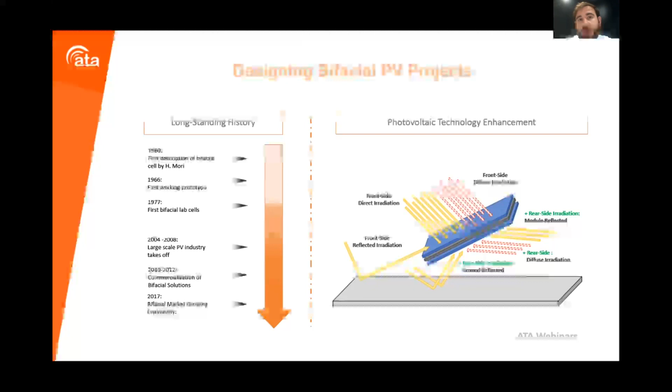This webinar is not only about bifacial modules, but also about designing PV projects with this technology. There are several factors you'll have to rethink when designing bifacial photovoltaic projects, such as the pitch, the tracker height, and the ground coverage ratio, as those factors affect the yield gain of the project. The idea is always to optimize the base case.

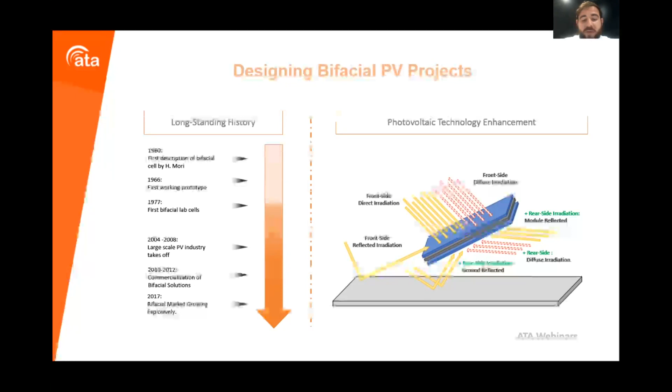For example, the height of the tracker being as tall as possible could be better for the bifacial gain, but you'd have a higher cost for your tracker. So you always have to look for the optimal point. I'm sure our panelists will explain this factor in greater detail.

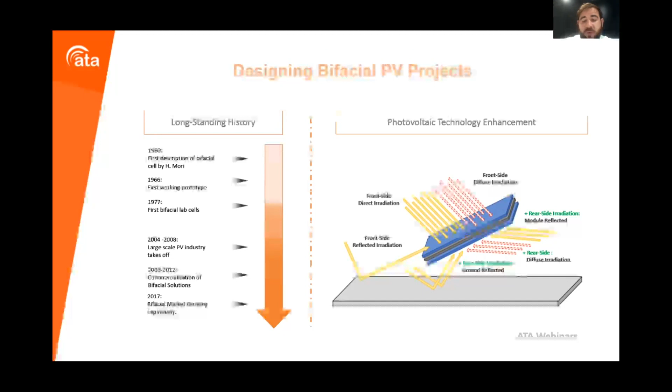There are also other factors like knowing the albedo of the project location, which is now critical, as well as other weather parameters such as humidity. It's also very important to start collecting data from ongoing projects to better understand the whole commercial potential of this technology. This is where advisory services may be required, helping to achieve proper design and construction of bifacial projects, as well as validating results collected in ongoing projects. At ATA, we are already participating in several projects and look forward to increasing our experience with this technology.

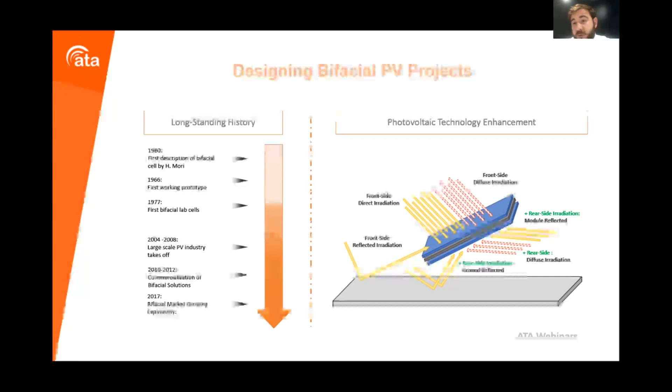Hello everyone, thanks for joining in from different corners of the world. My name is Vaibhav Joshi, and I'm heading business development for Sterling and Wilson for the Asia and Australia market. Sterling and Wilson is today one of the largest global solar EPCs, and outside US and China, we are the number one EPC in the world. We have been working with all the new technologies that come across the world, be it bifacial, floating solar, storage, and more.

So we have done our own analysis and our own understanding when it comes to bifacial. My presentation will give you a brief about what bifacial is and the main factors it works on, followed by the basic parameters to be looked into - introduction to bifacial, what is albedo, the basic ingredient of bifacial, then the yield parameters to be looked into, cost parameters, advantages, and then some issues. I won't say disadvantages, they're more issues which need to be tackled going forward. And lastly, what's the future, how we are progressing in terms of bifacial.

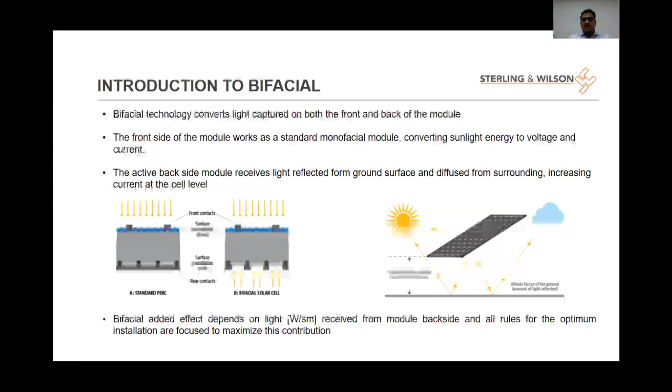Basically bifacial is all dependent on the albedo, how the albedo of a particular site is defined. So what's albedo? Albedo is basically a ratio of the reflected radiation that comes back from the ground divided by the actual radiation on the site, and this albedo differs based on the type of soil or type of ground which we are having.

If you see, the more clear the site is, when we say clear, we move towards, let's say, snow and mirror. So the clearer the site is in terms of properties, the best albedo you get, and this albedo is captured by proper technology, in terms of how we put the installations with the trackers, with the modules, with the inverters, that how best we can capture this albedo, that defines our gain.

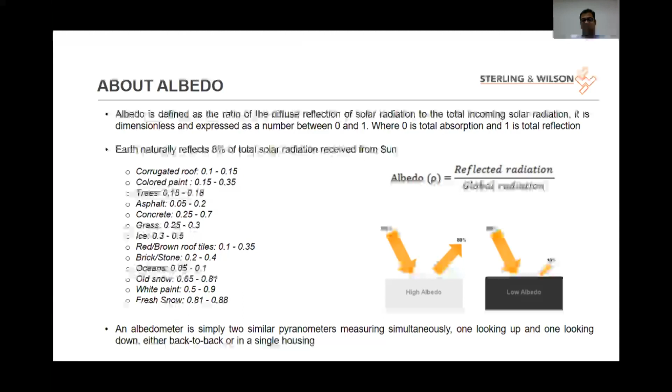Many of you would have heard about a device called Albedo Meters. An albedo meter is nothing but simply two pyranometers put together, one facing up, one facing down. This albedo meter actually captures the albedo of the site, and based on the albedo of the site, we are able to define what is the gain on this particular site versus a normal one. So that's pretty much what defines the bifacial.

Now, what are the parameters that give you a better yield in bifacial? As I clearly said, one is the ground albedo, the reflectivity of the ground, how well it reflects the radiations from the ground towards the rear side of the module.

Another important factor based on the geographical location is the clearness index. Clearness index is basically the amount of extraterrestrial irradiance which transmits through the atmosphere and reaches the ground. So having said that, for example, if we have a diffused atmosphere, we could see a better albedo. The worse the clearness index is, the better is the albedo, though it is not good for the overall site, because if the clearness index is bad, you are not getting the proper irradiation from the front.

But if you want to say where do I get more on bifacial, it's more in the diffused atmosphere. So the more diffused the atmosphere is, the better is the gain in the bifacial. So that's about the geographical location aspect.

Now on the technology, today everyone is working on making their module the best in terms of giving output. I think my friend from Jinko will cover more about the module part of it. So yeah, it depends on the bifaciality factor of the module. Secondly, today we are seeing that bifacial modules are giving us a lower annual degradation rate, to the tune of 0.3 to 0.5% per year.

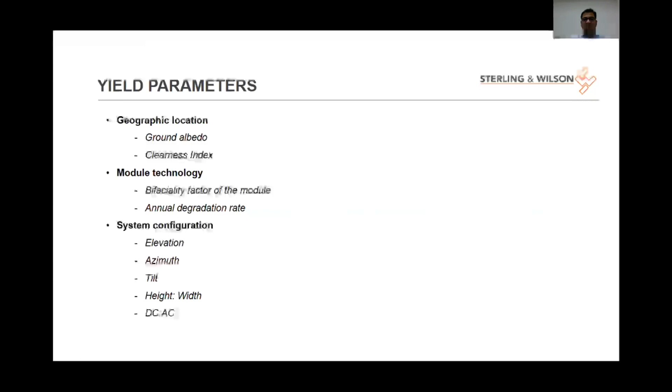Coming to the cost parameters, obviously module cost is the most important point - at what cost the bifacial modules come for the project. That's pretty important.

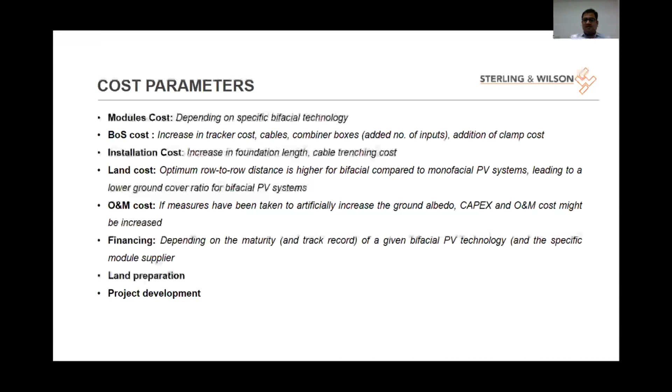In BOS cost, you might see an increase in tracker cost because you are elevating, and obviously the steel is going up. Your cables go up to a certain extent, and then also the combiner box, because you are taking inputs from the front side as well as the back side. And then you have some addition of clamping cost. So these are the parameters which increase the BOS.

In terms of installation, you might see an increase in the foundation length and the cable trenching cost because the cables have gone up. For land cost, from the developer's perspective, it's very important to see what optimum distance we are keeping for row to row distance, and how best ground coverage ratio we can cover.

O&M cost, now this is interesting. Why I say that is because maybe your cleaning of modules reduces with bifacials, but maintaining the ground conditions is a very important aspect we need to see. For example, today we are putting bifacial on a ground which is prone to develop grass. Going forward, you have to clean this ground at regular intervals to maintain that bifaciality. So upfront it might not look like a higher O&M cost, but going forward it may turn out to be a higher O&M cost just to maintain the albedo of the ground. That's something pretty important to see.

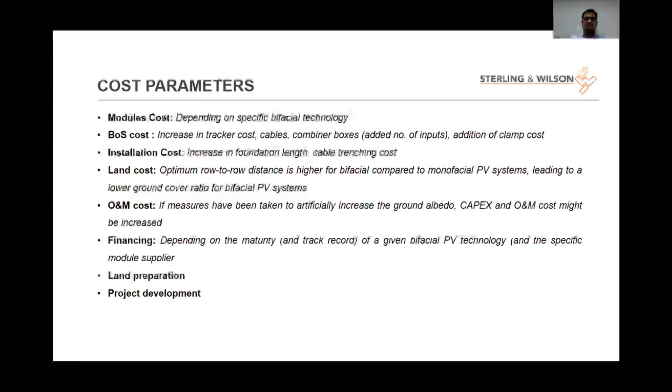Financing wise, we see the market is pretty mature, and bifacial is accepted as a technology. Financing, maybe a year before, would have been a problem, but now we are seeing the market maturing and financing is not becoming a big problem. Land preparation - if we increase the total area because of putting bifacials, then obviously your land preparation cost goes up. Project development will more or less remain the same. So these are the basic parameters in terms of cost that need to be seen.

Now coming to the advantages - yes, it's a higher efficiency, so that's a big advantage. Extended durability, because we are putting glass composite, so the environmental and mechanical influences are less. More flexibility in PV design - the idea here is that with bifacial, maybe the orientation, the tilt, the angle might not be that important, because either way you are going to capture the radiation from some direction.

Extended warranty - bifacial panels are coming with 30 years warranty now, along with lower degradation, which I already mentioned. The bifacial modules are PID free. And if these are frameless panels, you're not putting any aluminum frames, so no grounding is required. That might be an advantage.

Coming to the issues, I will say more than disadvantages. The modules may be heavy because of double glass rather than a single glass.

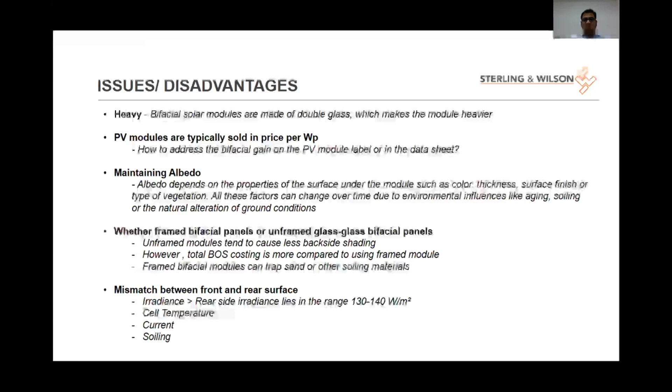Another point is at what rating to sell these modules. Obviously, we all know PV modules will be sold on a watt peak basis. So how do we determine the watt peak of a module when it is being sold?

On albedo, as I already mentioned, it depends on the properties of the surface, color, thickness, and all these factors can change. For example, today I measure an albedo at a site for 3 months when it was typical summer. Now, if this site is also prone to rains for the next 3-4 months, maybe that was not getting captured, because during that point, the albedo might be different.

Secondly, if it is vegetation, then regular cleaning is required. And then even the soil, with its age - for example, today a soil is giving an albedo X, but 30 years down the line, because of the soil properties itself, the albedo would reduce. So that is a particular thing which is very important to address and consider.

And then there's a debate between framed bifacial or unframed bifacial, because with unframed, your BOS cost might get a bit high. But unframed modules cause less backshading, though their BOS cost might go high. So that's a trade-off again.

And then finally, the mismatch between the front and rear surface - that is something to be seen, how to capture it properly, because the front side irradiance versus the back side, similarly the temperature on both sides, current on both sides, and soiling losses on both sides. So they are different. How do we capture this mismatch? That's something very important to be seen.

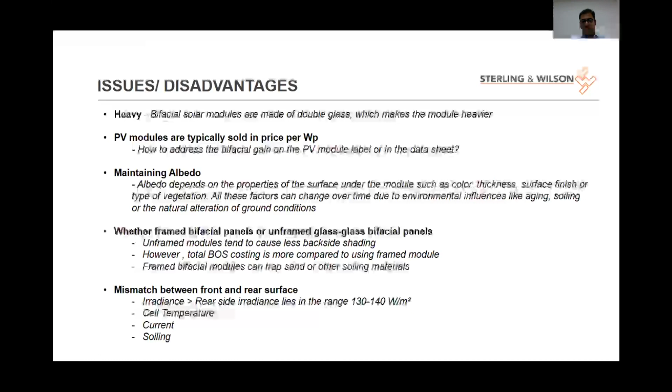Going forward, one of the best ways to work on bifacial is to put a vertical installation. Nothing to worry about, because both sides will capture whatever best is possible. That is something which will gain traction going forward.

And secondly, the double peak profile, which is the east-west kind of profile. What happens is it helps you in the generation peak. So let's say 50% panels face east, 50% panels face more to the west, and then your morning generation and the afternoon generation both are getting captured and well managed.

And going forward, we'll see more bifacial coming on floating technology, because water as a reflector will be much better - you won't have to manage the properties of water. As I said, for grass and other surfaces, you have to manage the properties, but here there won't be any problem of managing the properties of the ground.

So these are some of the trends which will gain more traction going forward, as I would say. That's pretty much from my side on the presentation, and we'll be more than happy to address any queries as they come. Thank you, thanks guys.

Good afternoon everyone, my name's Samuel Blackadder. I'm from Jinko Solar, I'm the head of utility and projects for Australia. I wanted to talk today about our bifacial product, mainly the PERC and mono products for bifacial. The presentation will be a little bit more brief, but coming up and answering a lot of the questions we get typically from EPCs and developers regarding modules, designing, and albedo. As I've said before, it is a maturing market now. Next year we'll be looking at producing around 1.4 to 1.6 gigawatts of bifacial production within Jinko. So it's a very exciting time for this product.

So we'll start the presentation. We'll be going through the module structure, which has been talked about briefly. I won't go too far into the bill of materials and some other products, but if anyone wants that, we can discuss more online or in the Q&A. We'll be going through the warranty, the degradation, and how that plays into account with LCOE - I believe there's a few questions on that as well. And how do we calculate the extra energy yield in terms of how we put that into PVsyst? How does that get modeled, and what figures can you use in those calculations?

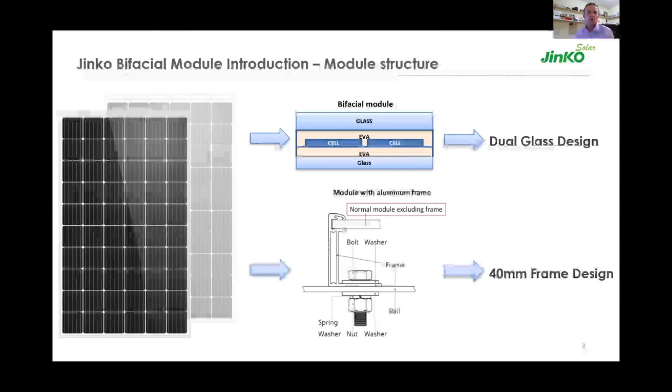So we do have two different types of bifacials within Jinko. We have the dual glass design, which is frameless, and we also have a 40mm frame design as well. What we've noticed within the Australian market, mainly due to wind load regions, is that we need to have a frame design. This is mainly due to high wind load C and D regions that require this extra protection, but we can accommodate either solution for the customer.

Regarding the warranty, it was posed in Q&A a little bit before. The bifacial modules will have similar degradation to a dual glass module. This is because we are using similar products and the glass on both sides. So for that, we can use the calculations for LCOE and for your yield on a 30-year calculation period.

For the first year you do have 2% degradation, which is combined, and each year after that, from the 2nd to the 30th year, is 0.5% degradation. This is a step down from the 0.7% which is on the standard modules.

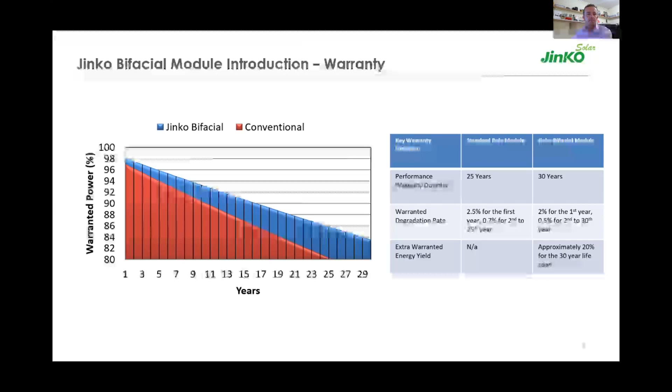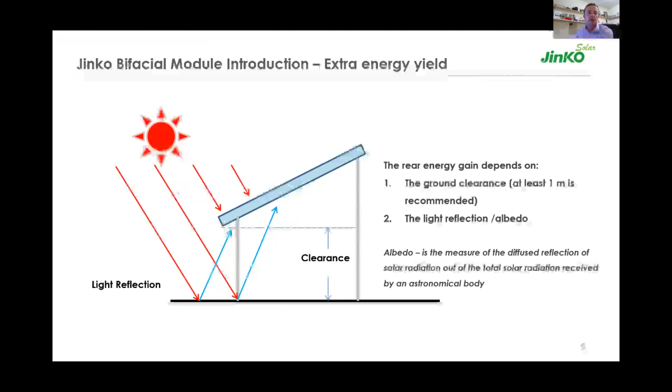So regarding albedo, I won't go into this too much because Vabhav's presentation was far more in depth. But albedo is about the light reflection from the ground and substrate surfaces that you're going to be using within the project. All these surfaces need to be maintained throughout the period, otherwise generation can be affected. We suggest the ground clearance should be somewhere between 1 to 1.2 meters for elevation to get the appropriate amount of albedo and light reflecting back to the backside of the panel.

So for some of the different surfaces we're going to be talking about, these are the most common ones that we get requested on. These are some energy gains we've actually calculated from our R&D facility in Shangrao, which is one of the facilities that will be producing the bifacial. We've been conducting long-term tests and finding the actual differences with the modules as well as using albedo meters to find out the actual reflectance and gain of yield.

It's actually interesting to note we have a wide range that go well beyond these 5 categories. We also look at things like copper plating, fresh snow, wet snow. We've got differences in wet bitumen and dry bitumen, and also with galvanized steel and the difference if it's dirty or new.

So the most important thing EPCs and developers will need to do is assess what that surface is, how it can be maintained, and what yields you're going to be able to get. As Vabhav has pointed out as well, in areas that have monsoonal seasons and also change of seasons, this will potentially affect the reflectivity of the surface as well. So these are all things we're going to have to take into account.

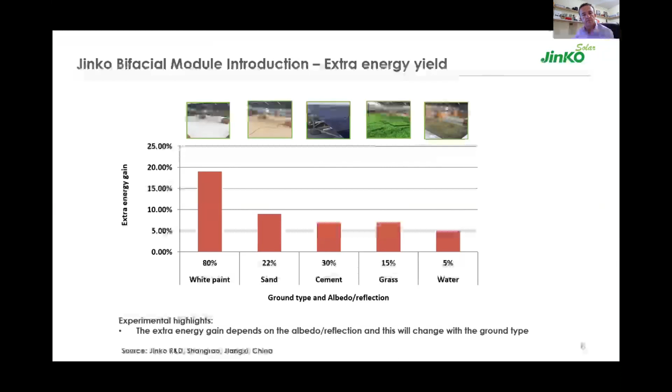So here, this is one part that does confuse some people, or there's not some understanding of it: people think that if there is a reflectivity of, say, grass at approximately 15%, you don't get an actual 15% gain from the module. That's just the actual light reflection from there. What we've done is we've got some expected yield gains to give you a bit of an idea about how that actually plays out.

A little bit in terms of the installation—I'm sure Jose Torres from Soltec will go into this a lot more in depth—but it is important to make sure that you make the right partnerships with your installation and your racking company.

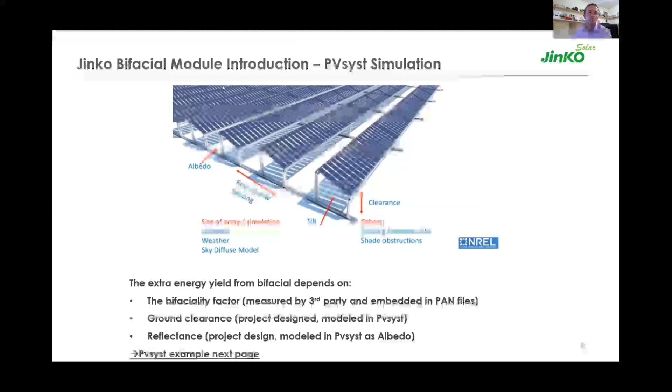Racking is going to be quite a significant part, as modules, in that you need to make sure you choose the right manufacturer that can help guide you on this, because there are a number of factors that will affect the module in terms of generation. A couple of these are the bifaciality factor, the ground clearance, and also the reflectiveness. So ensure that you not only engage your module manufacturer, but also your racking manufacturer, so that we're all on the same page and work together to make sure your project will be successful.

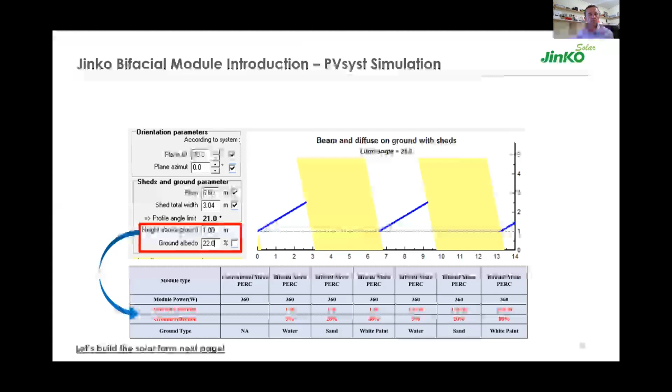The system cost breakdown is quite more in depth when you're looking at bifacial, and I know Veb has gone through that so I won't go into it in too much detail. But there's a lot of other parts of this installation you need to look at and ensure you've covered off. One of the most important is actually maintaining that surface structure and making sure it has the right reflectivity in your O&M.

Coming down to the extra energy yield, we've got some project costs per dollar—these are in American dollars—so this is for a traditional mono-PERC. And then you've got the suggested extra cost from going from a mono-PERC to a bifacial mono-PERC. The extra cost there is approximately 1.5 cents to go to that framed option.

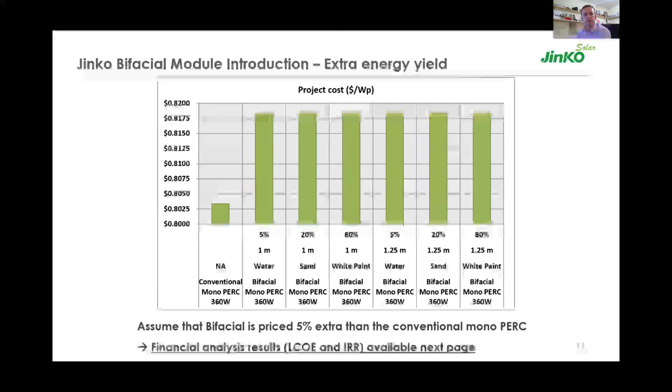On to the next slide. We'll see a breakdown roughly of how that LCOE compares to the IRR. As you can see, with the US cents per kilowatt hour, having that subsurface, we really need to make sure the extra costs for your BOS and installation is actually going to be worthwhile. And we can see that depending on your surface and your extra costs involved, you can have a greatly increased IRR.

This is one reason why a lot of companies are looking at picking this up. These figures are based on a traditional 25-year degradation and warranty period, only because I wanted to compare apples to apples, rather than showing a 25-year period versus a 30-year period. Obviously, if you were to compare that traditional mono-PERC to a bifacial mono-PERC with a 30-year period, those figures would greatly increase on your IRR.

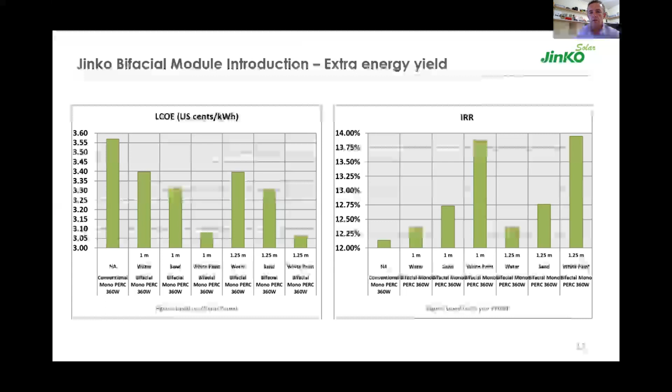And that's all that I have.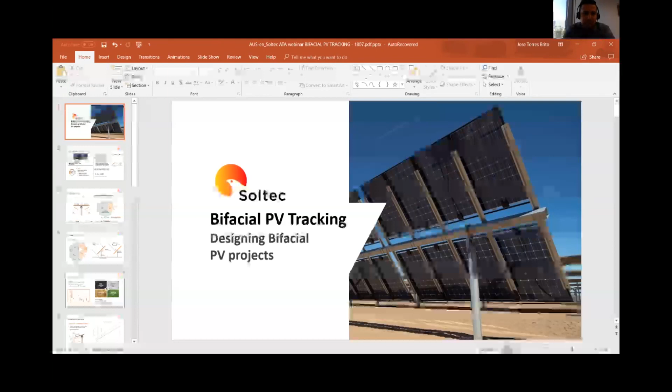Can you see my screen? Yes, we can see it, not full screen. Now, all right, okay great.

Thanks for that again. So let me introduce myself—I'm Jose Torres, sales engineer based in Melbourne. I've been in the industry for about 10 years, both on the panels and the racking side of things, so this is very much of interest for me personally and professionally.

A little bit about Soltec: we're a tracker manufacturer, and we've been doing bifacial designs for a few years now. The first project we did was in 2015—it was a commercial size project, first in the world, and we've been tracking that as it comes along to see how that's impacted the difference in yield.

And on the back of that, we launched BiTEC, which is Bifacial Tracker Evaluation Center, in 2018. This is so we can understand how bifacials impacts the yield and how we can maximize the yield that we get using bifacials from a tracker perspective.

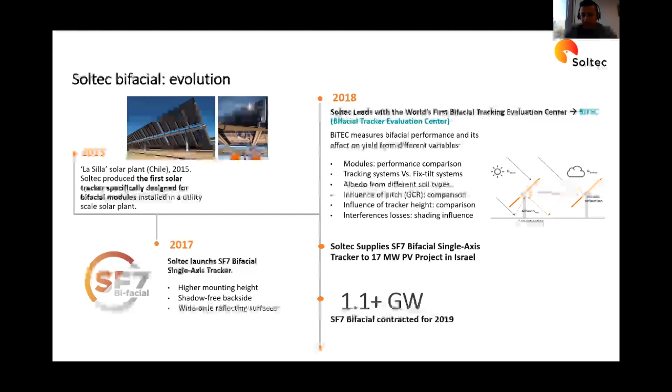Just a little bit more about that. We've done a 17 megawatt project in Israel in 2018 as well, and as the other panelists have pointed out, there's a lot more traction and a lot more interest in bifacials. So much so that we're looking at doing over 1.1 gigawatts worth of bifacials in 2019 that has already been contracted.

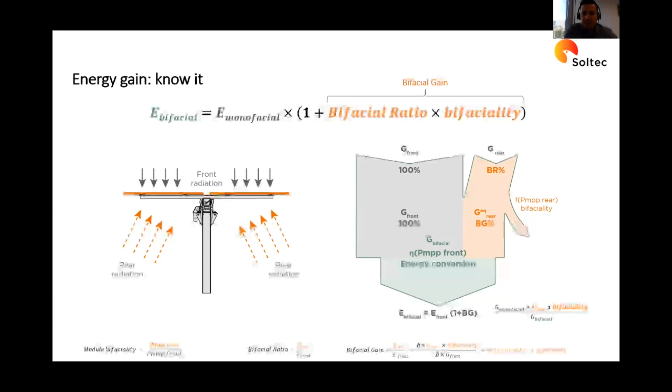As the panelists have said, as Samuel said, the panel's bifaciality is essentially just trying to maximize the rear irradiation on the panel. So as a tracker, that's the perspective we're looking at: how can we maximize that rear irradiation?

From a bifaciality ratio perspective, there are certain different places where you can get the radiation. One of them is the beam, diffuse energy is another one, but the biggest one is the soil. And that has a lot to do with albedo, which is something you have to really think about when you're looking at bifacial projects.

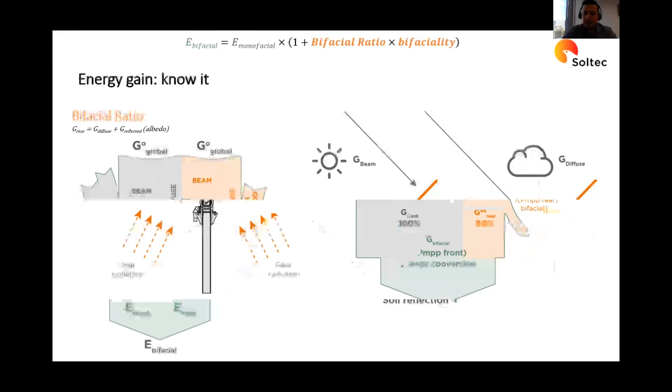Albedo is essentially how much reflectiveness a surface has. So obviously, the whiter the surface and the smoother it is, the more gain or more energy or more reflection there is that you can capture.

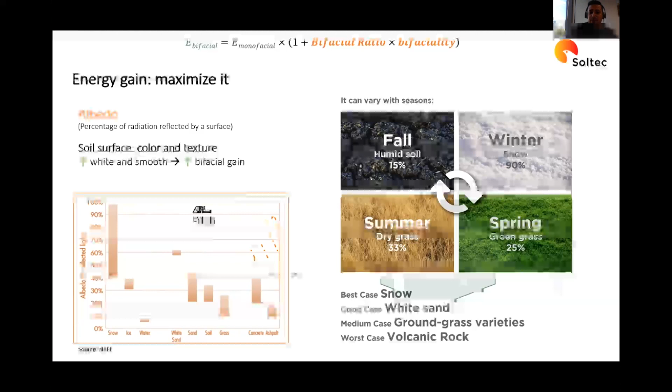We've got snow at 90%, dry grass at 33%, and spring green grass at 25%. As the other panelists have mentioned, it's a big impact on the energy yield you can get from it. What we've noticed in our projects and in BiTEC is that it's approximately linear: the higher the albedo, the more bifacial ratio or the more radiation you can capture.

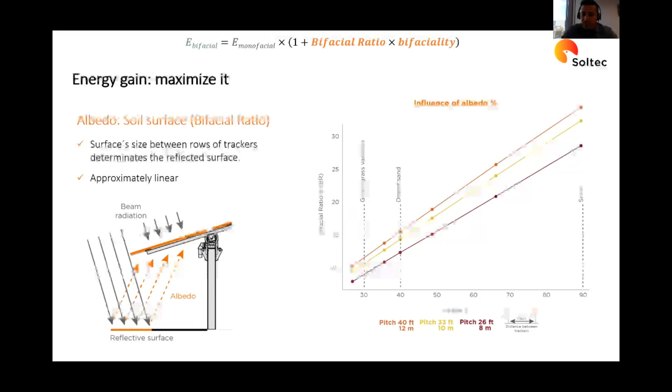Also pitch, as it's been mentioned, is very crucial as well. Pitch is the distance between trackers east to west. Being a dual panel, two panel portrait tracker, it is very advantageous in that sense. The wider the aisles are, or the wider the distance between the trackers, means there's more surface area of the soil, which means there's more reflectiveness, which means there's more potential of energy gain on the rear side of the panel.

Obviously, as BJ mentioned, the wider it is, you start to lose land usage. So there is a sweet spot there. We recommend 12 meters, but anything between 10 and 12 meters is ideal in the instances that we've seen.

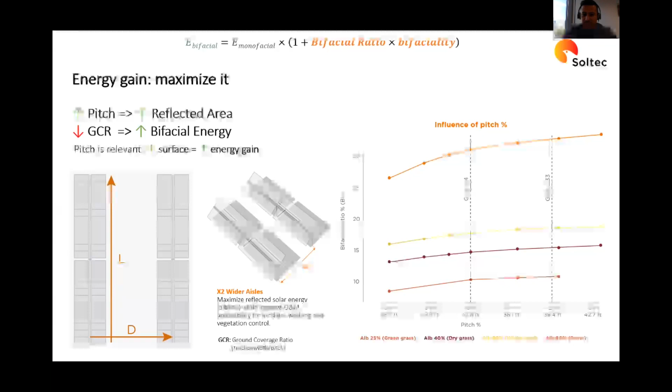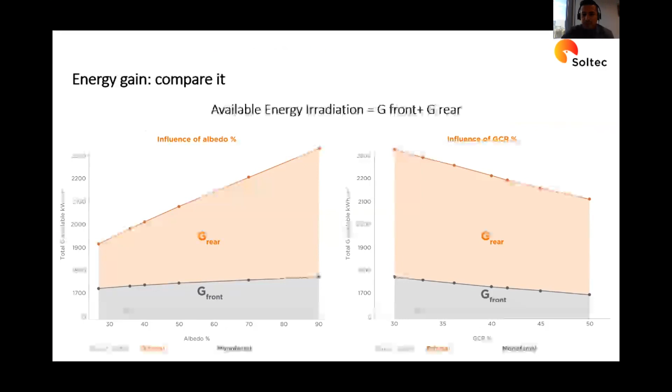To sum up, albedo and GCR have a big influence, especially in bifacial panels. You can see that the influence they have is greatly impacted as you go higher in albedo, and once you get the right GCR, you can have a bigger capture of radiation on the rear of the panel, more so than on the front of the panel.

One of the other factors, as mentioned previously, is the height of the tracker. The height is very crucial in terms of causing shading. So the higher you get, the less shading you cause. But again, there is a trade-off: you can go too high, which means more material cost, which means the tracker becomes more expensive.

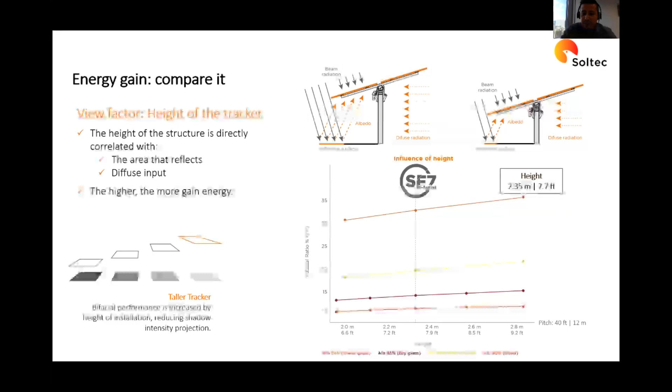So you start to lose the benefits of having bifacial panels. In the studies that we've done, 2.35 meters is a sweet spot again, not only for installation purposes, but for cost of material as well.

I think this is a crucial part when choosing the racking: the type of tracker or racking and the shading that it causes on the back of it. Obviously, there's always going to be shading, but the less you can do that, the more yield you can get. Having two-panel portrait, you have the torque tube running down the middle, so there is no shading on the panel directly from the torque tube.

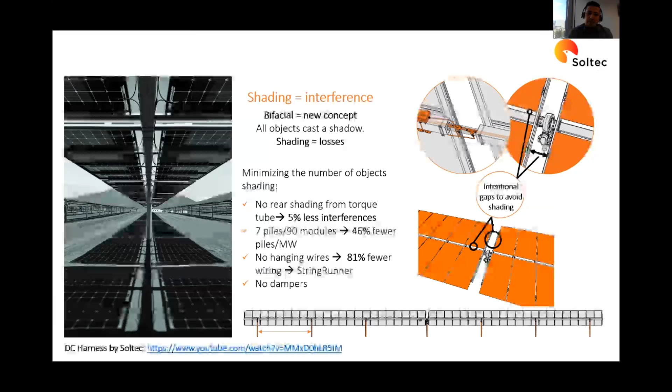Being able to design it with a little bit of a gap in the middle as well means that there's more light getting through, which causes less shading. Again, the fewer piles, the fewer objects you have on the underside of the tracker, the more chances you have of capturing that radiation. And this is very important because of hotspots.

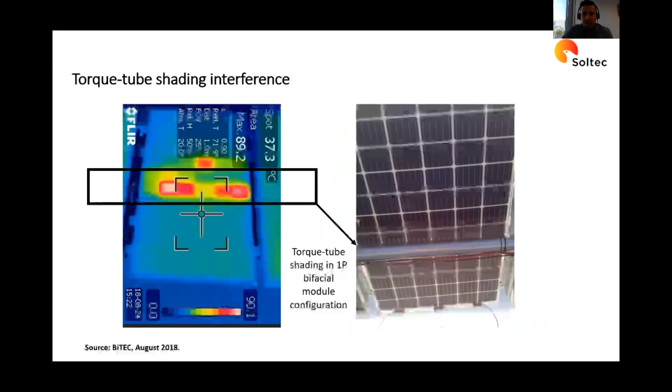Bifacial panels run with a high current, so they have the potential for hotspots. Having a torque tube running down the middle of a panel can have big issues with hotspots. So I think that is something that has to be considered when designing it or when thinking about bifacials on a project.

There's two ways of looking at it when you're designing a bifacial plant. You can either hit the same peak power, so 50 megawatts in this instance, or you can look at hitting the same kilowatt hour per year. As you can see, there's obviously higher cost for the module price and for the DC/AC side of things, but you're still getting a kilowatt hour per year gain of 14%.

That has an advantage. Or you can go and try to hit the kilowatt hours per year, which means your cost overall will be lower, because of less modules, less trackers, less installation costs. It means the final cost will be 7% lower. So that's an interesting way to look at bifacials in a project.

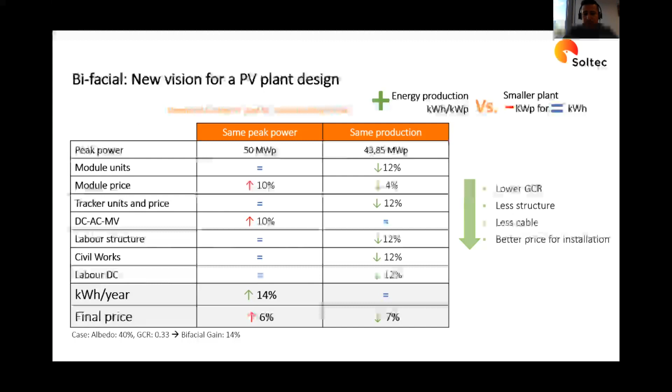So just to sum up what I've said: high albedo, or the whiter and smoother the surface, the higher the pitch, the bigger the pitch, and the higher the height, with the sweet spot there, and less shading on the back, you're going to get more energy, which is always good for a project in terms of return on investment. So I guess that's it from the tracker perspective, and that's my presentation.